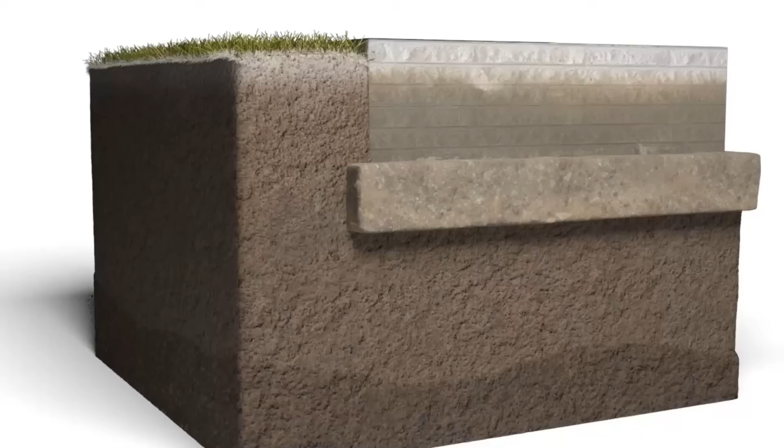Different surface types in the city respond differently to this weight. Clay soils with artificial fills, common in Brooklyn, yield slightly, leading to subsidence of 7.5 to 60 centimeters. Other soils experience less subsidence, and rock-based areas see as little as half a centimeter.

The scientific team warns against ignoring the double threat of sinking soil and rising sea levels. Since 1950, New York's coastal water levels have risen by about 23 centimeters. The east coast of the U.S. faces a particularly high risk from rising sea levels.

Hurricanes frequently cause flooding, as seen with Hurricane Ida in 2021, which overwhelmed New York City's drainage systems. Frequent contact with salt water weakens materials like concrete and steel. Other problems include a lack of floodplain standards, additional sinking due to groundwater extraction, and a lack of sediment in New York Harbor.

Sediment from the East River and Harlem River used to protect the city from strong northeast winds and hurricanes. Lower Manhattan's particularly at risk, with its southern tip only 1 to 2 meters above sea level. In October 2012, Hurricane Sandy caused over $70 billion in damages, mostly from flooding. In Rockaway Beach, homes were not only flooded but also caught fire, destroying 200 homes in Breezy Point.

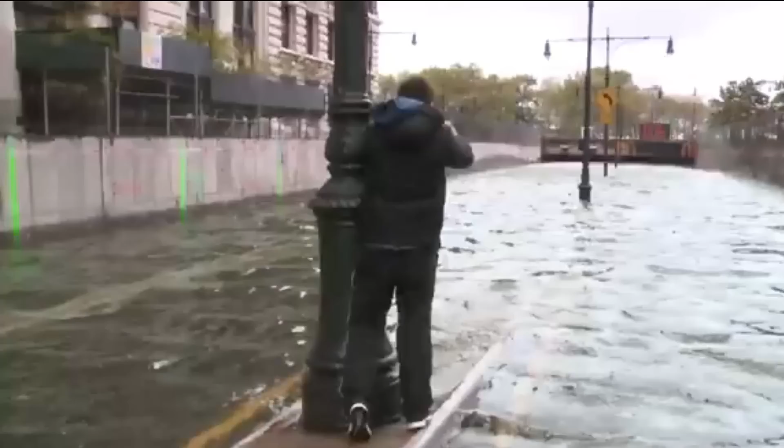Since then, a $1 billion federally funded program has fortified 9 miles of Rockaway's Atlantic-facing beach. The boardwalk was rebuilt in concrete to double its flood protection. Quarry stone groins were added to break the waves, and sand dunes were underpinned with a stone-filled trench and concrete wall. However, the bay side of Rockaway Beach has not received as much attention. If another storm like Sandy occurs, it could cause severe damage from the other direction.

A recent proposal by the U.S. Army Corps of Engineers has allocated a staggering $52 billion to protect the New York region from future storms. The plan includes a system of sea barriers and gates across the mouths of major bays and inlets along New York Harbor, and a seawall encircling Manhattan to barricade the island against the harbor that has long defined its identity.

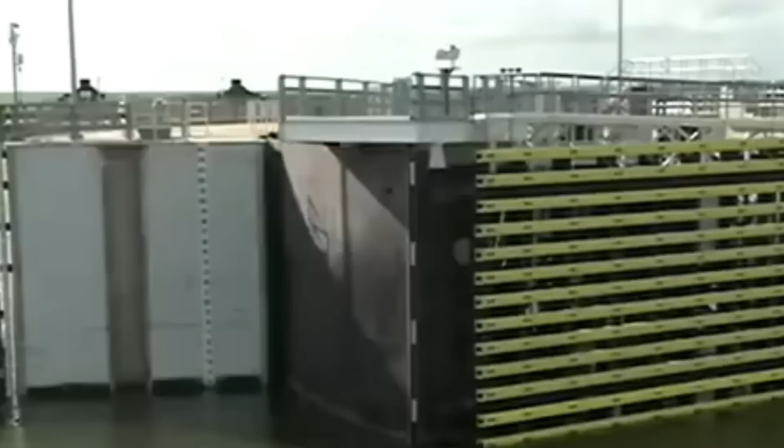If all goes smoothly, construction on the barriers could kick off as soon as 2030, with an expected completion date in 2044. However, critics argue that the cost analysis used by state and federal governments is skewed toward protecting property rather than maximizing protection for the largest number of people, regardless of their economic status. For instance, a $1 billion plan to protect part of Lower Manhattan would provide direct flood protection to just 62 condominium and rental buildings, 21 commercial properties, and 19 public buildings.

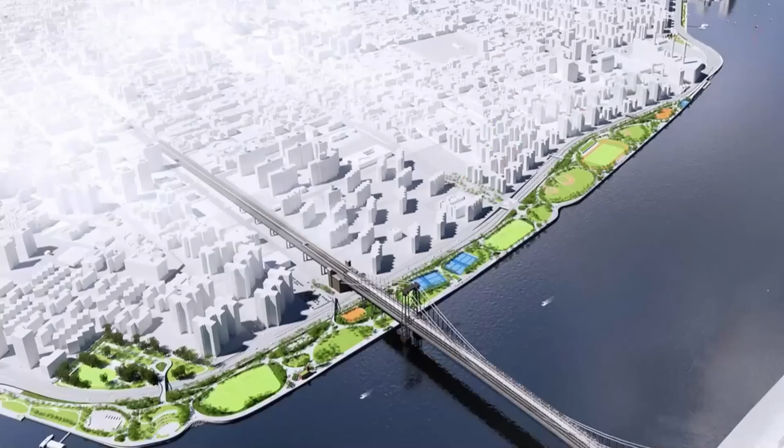So, what's the best solution that'll actually solve this problem? The Asser Levy renovation, completed in 2022, is part of the East Side Coastal Resiliency, the largest urban resiliency project currently underway in the U.S. Over the next 3 years, at a total cost of $1.8 billion, ESCR will reshape 2.5 miles of Lower Manhattan shoreline.

But ESCR is just one piece of a much larger $2.7 billion initiative called the Big U, a series of contiguous flood resilience projects that run from Asser Levy near 25th Street around the southern tip of Manhattan and up to Battery Park City along the Hudson.

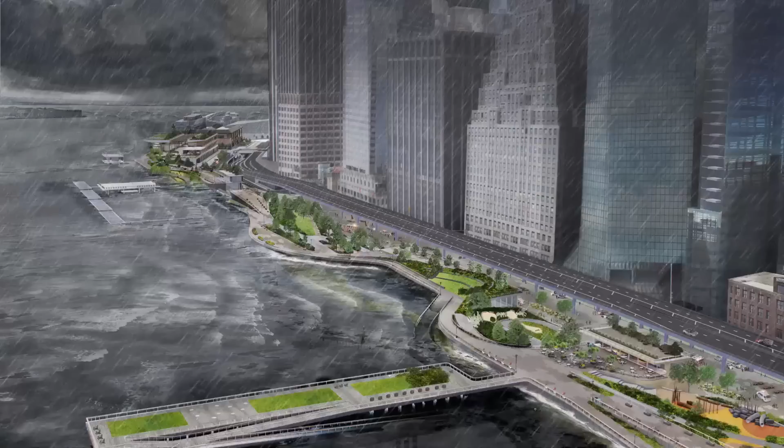When finished, the Big U will create 5.5 miles of new park space designed to protect over 60,000 residents and billions of dollars in real estate from sea level rise and storm surges. Residents of public housing rely on a narrow park to buffer their homes from a river that's already risen 8 inches. The Big U was conceived after 2012 Superstorm Sandy, which flooded 17% of New York City and caused $19 billion of damage. Like Hurricane Katrina back in '05, Sandy pushed New York and other flood-prone coastal U.S. cities, including Boston, Norfolk, Charleston, Miami, and San Francisco, to embrace the Dutch concept of living with water, which emphasizes building infrastructure that can both repel and absorb water while also providing recreational and open space.

In New York, ESCR, like any large infrastructure project in a densely populated area, has faced many challenges. Despite this, significant progress is being made.

The ESCR project area covers a flood-prone wedge of Manhattan's natural topography, a pinch point between two higher stretches of shoreline. 400 years ago, when the island was inhabited by the Lenni Lenape, this shoreline was woods and marsh that never rose more than a few feet above sea level. Tidal creeks drained from the uplands, dense with American chestnut, aster, and goldenrod, winding through Spartina meadows to the river.

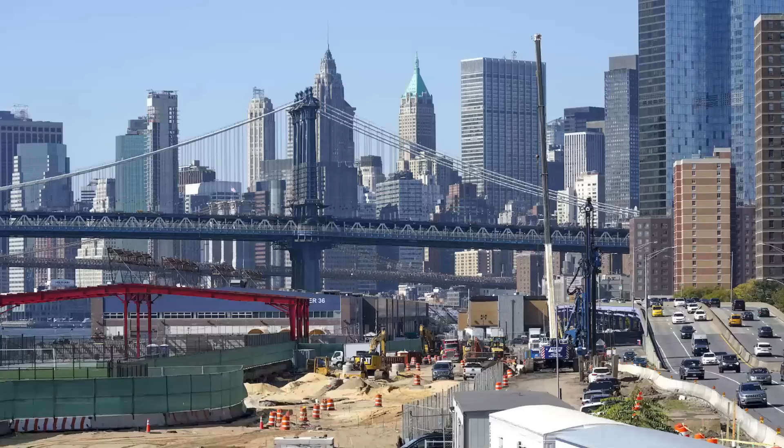Today, that landscape's buried beneath 4 public housing complexes whose roughly 10,000 residents depend on East River Park to protect their homes from a waterway that's risen 8 inches since the mid-20th century.

The East Side Coastal Resiliency ESCR project is the first segment of the Big U to get started, and it hasn't been an easy ride. From debates about its final design to budget cuts and new concerns about climate change risks, including this year's extreme rain events, the path has been rocky.

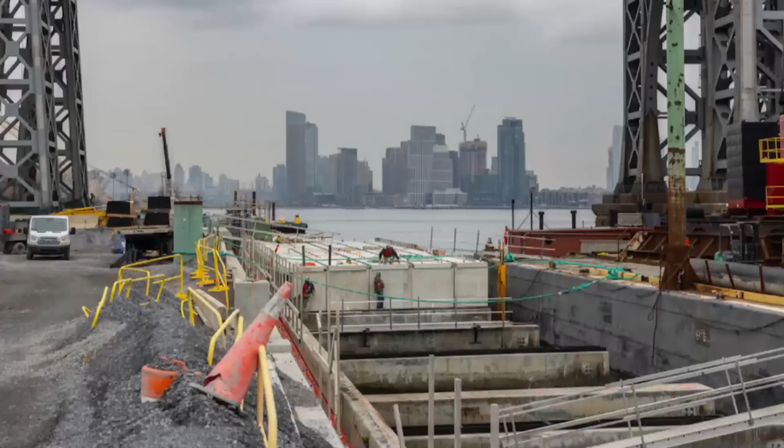The original 2014 design aimed to preserve East River Park's running track, tennis courts, and shady groves of pine, oak, and cherry trees. But in 2018, Mayor Bill de Blasio's administration quietly changed the plan. They argued it'd be faster and cheaper to clear the park, raise the landscape with over 1 million tons of fill, and then rebuild on top. Unlike the permeable buffers championed by the Dutch, the raised park would act more like a hard barrier.

While some opposed the redesign, many residents of the public housing complexes, which are at high risk of flooding, support it. In fall 2021, demolition crews began their work. The new park, with its pathways and vegetation beds, will act as a berm to keep water out of the city streets. Right now, a fence divides East River Park in half.

In the southern section, new steel sheet piles stand at the water's edge, about 8 feet above the original grade. The height can protect the adjacent city streets from a once-in-100-year storm like Sandy. Massive excavators are raising the park's elevation with fill from quarries in upstate New York.

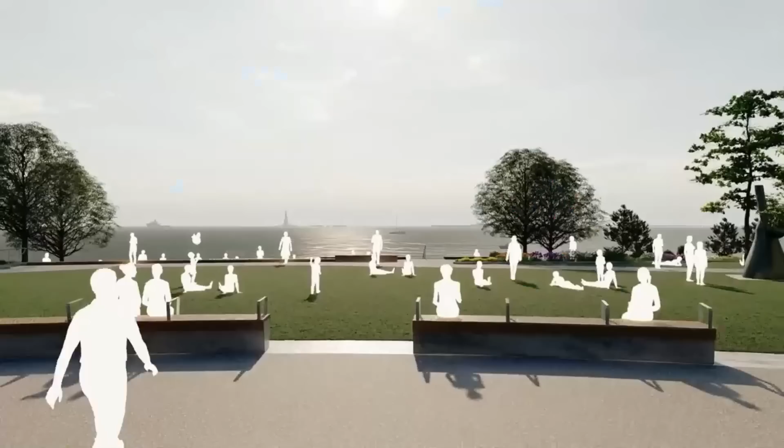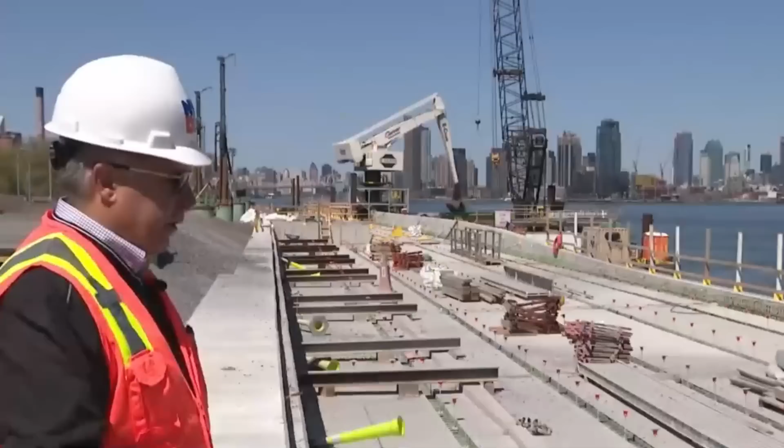Once completed, the park will feature pathways and vegetation beds winding around sports fields, an amphitheater, and playgrounds, creating a terrace landscape that'll keep water out of city streets. More flood walls and retractable gates will run the park's length and extend into surrounding streets, upgrading old infrastructure to prevent stormwater from mixing with wastewater during floods.

North of the fence, construction is almost complete at the Stuyvesant Cove Park, a narrow quarter-mile strip of land just south of Asser Levy Playground. Though the park may lack the original design's rain gardens and water-absorbent features, Stuyvesant Cove stays true to another Dutch principle, blending hard infrastructure into the landscape.

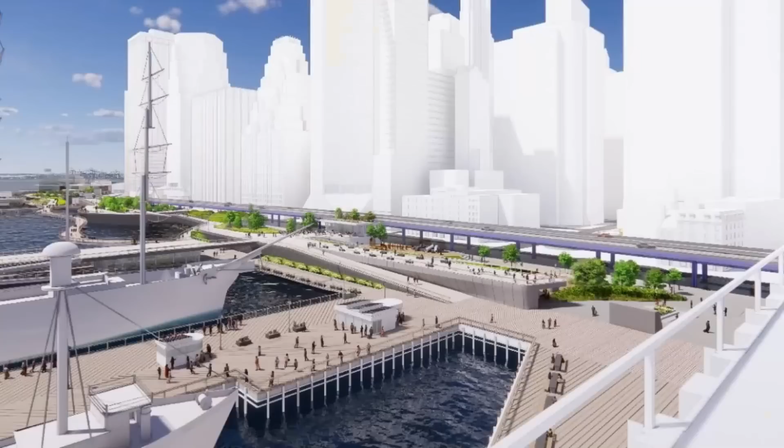Walking and biking paths wind through garden beds planted with salt-tolerant native plants like viburnum, wild cherry, and milkweed. The park's concrete flood wall and 2 retractable steel floodgates, one 42 feet long and the other 77 feet long, seamlessly blend with the rising topography.

Other segments of the Big U are also in progress. At the Battery, the southern tip of the city, the waterfront's being elevated with fill. Next, they'll install flood walls, higher capacity drainage, and new park spaces. Similar projects to protect the historic South Street Seaport area and the financial district are still in the planning and design stages.

Once completed, the Big U will safeguard the financial district, a hub of global economic activity, and tens of thousands of New York's most vulnerable residents.

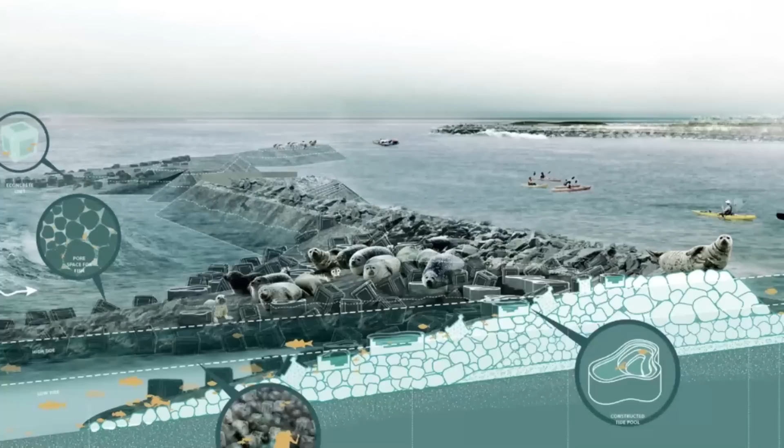In other boroughs, there's been even more progress. On Staten Island, the Living Breakwaters project, another winner of the Rebuild by Design competition, is on track for completion next year. This project features a network of breakwaters off Staten Island's southern tip to reduce wave action and provide habitat for marine life. The state's also bought and removed homes on Staten Island's shore to allow for periodic flooding. In Queens at Rockaway Beach, a steel-reinforced concrete boardwalk has replaced the wooden one lost during Sandy, and a concrete retaining wall helps keep sand in a new dune system from washing away during large storm surges.

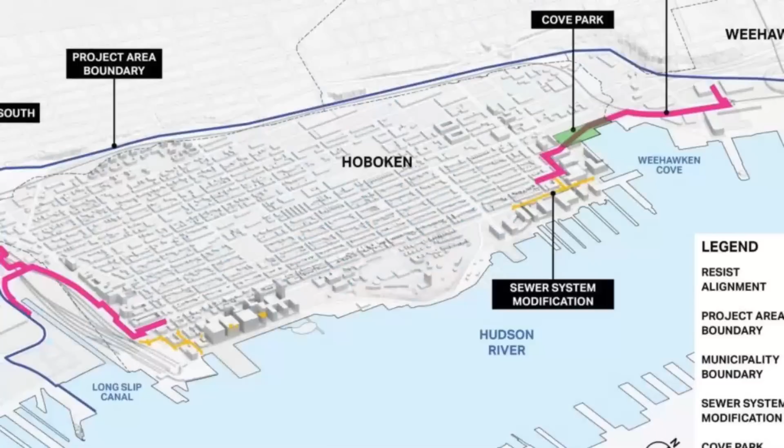The Dutch-inspired approach to resiliency planning is gaining traction in other U.S. cities. Across the Hudson River in Hoboken, New Jersey, one of the most innovative flood projects in the U.S. is underway. Unlike East River Park, Hoboken's implemented not just flood walls and sewer upgrades, but also park spaces that can hold and absorb excess water. This makes the city much better prepared to handle storm surges and the increasingly common rain bombs due to climate change.

New York State is, without a doubt, one of the cornerstones of American civilization, so it's hard to believe that this region's served by a decaying railway system. The Northeast Corridor is the longest electrified rail corridor, spanning up to 8 states from Washington, D.C. to New York to Boston. This 457-mile-long corridor is used by passenger and freight, as well as intercity travelers, serving 17% of the U.S. population. Dubbed the busiest railway line in the country, it supports more than 2,000 trains with 800,000 daily passengers.

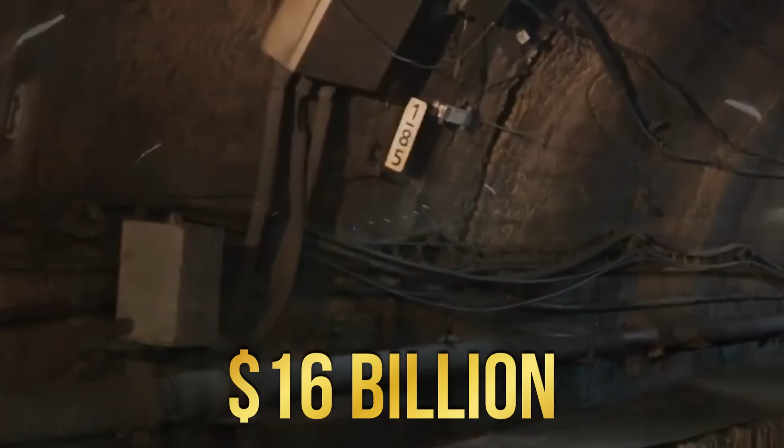The portion of the Northeast Corridor between Newark, New Jersey and Penn Station is 10 miles long and carries over 200,000 daily Amtrak and NJ Transit passenger trips. It has only 2 tracks which support approximately 450 trains, while a majority of the remainder of the Northeast Corridor has 4. The 2 tracks mean there's a traffic bottleneck in one of the most vital arteries of the region. Picture this: if even one of those tubes under the Hudson River becomes unoperational, it'll cause a $16 billion loss to the nation's GDP and add 30 minutes of travel time in an already congested railway station.

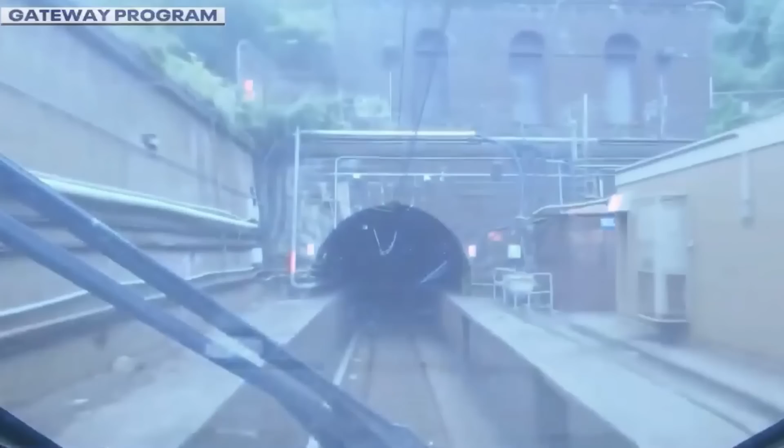At this point, it's very much in America's interest to make travel fast and headache-free in such an essential economic region. The Gateway program will replace and update rail infrastructure assets that, in many cases, are over 100 years old. The 2-track rail line used by Amtrak and NJ Transit Rail Operations has reached its full capacity of 24 trains per hour. To increase the railway capacity of this section of the corridor, there are several expansions planned.

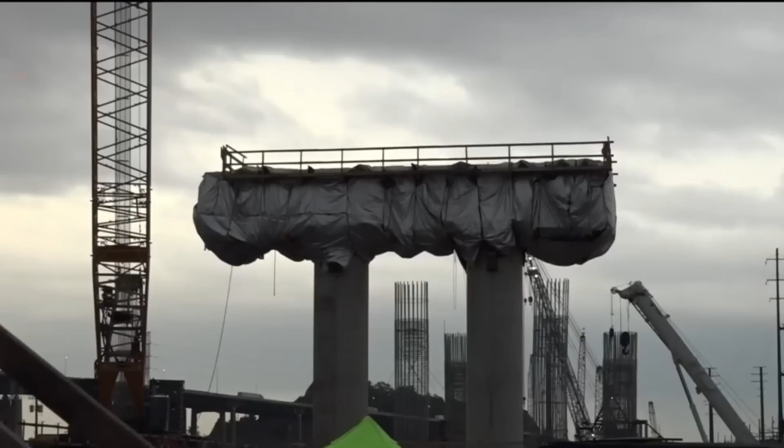This includes: 1. A new tunnel under the Hudson River. 2. Stabilizing the existing 100-year-old tunnel under the Hudson. 3. New tracks and platforms to be placed at Penn Station in New York. 4. Replacing the Portal Bridge and Sawtooth Bridges in New Jersey. These modifications and several others come at a staggering cost of $16.1 billion. But this price tag seems to be worth it, as this project will reduce travel time, inject $85 million a month into the economy, and create 72,000 jobs.

The construction will also utilize U.S. suppliers and manufacturers. More than just stimulating the economy, the Gateway program will eliminate 2 million tons of CO2 from the air. In the beginning, New York and New Jersey were going to divide the project expense, but luckily they'll be saving a few bucks as the government stepped in.

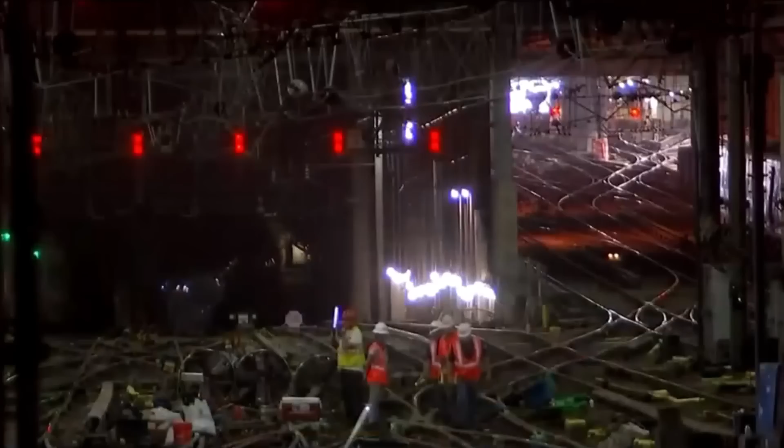As of now, the majority of the expenses will be covered by the federal government. Under the Infrastructure Act, the project received an additional $3.8 billion. Today's $3.8 billion infusion follows other funds I announced previously and brings the federal total to over $11 billion.

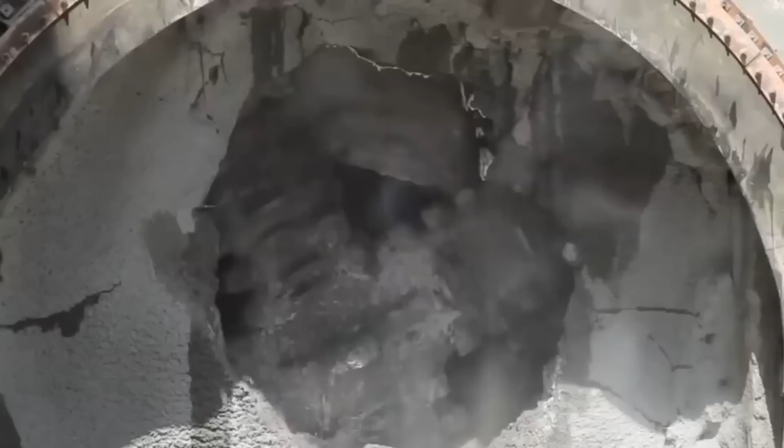Consequently, both New York and New Jersey only have to contribute 15% to the Gateway program. The project was proposed in 2011, but it took nearly a decade to convince politicians and federal agencies to fund this cause. In 2021, it was formally approved by the federal government. Work officially began in 2023, although completion is set for 10 to 12 years later. The first phase of construction includes creating a 2-track tunnel under the Hudson River and replacing the obsolete Portal North Bridge with an elevated one.

Let's start with the existing tunnel under the Hudson River, called the North River Tunnel.

The North River Tunnel is in desperate need of renovation, not just because it was built in 1910, but also because it was heavily damaged in 2012 by Superstorm Sandy. The intense flooding filled the tunnel with millions of gallons of salt water, leading to disabled trains, signal malfunctions, and delays.

In May 2014, Amtrak stated that within 20 years, one or both of the tunnels would have to be shut down, as they are more or less operating at full capacity.

The Pennsylvania Railroad started construction in 1903, and it was opened to the public in November 1910. The tunnel was considered state-of-the-art by the standards of the 20th century, but not so much now. It's a simple one-track in, one-track out system connecting New York and New Jersey. The tunnel was created using cast iron tubes, lying 20 feet below the riverbed and silt.

The neglected walls are unable to stop saltwater from intruding into the tunnel. The continuous leaking of saltwater has damaged the concrete, which is now falling apart. Inside the tunnel, two bench walls run on both sides, and these bench walls are also corroding.

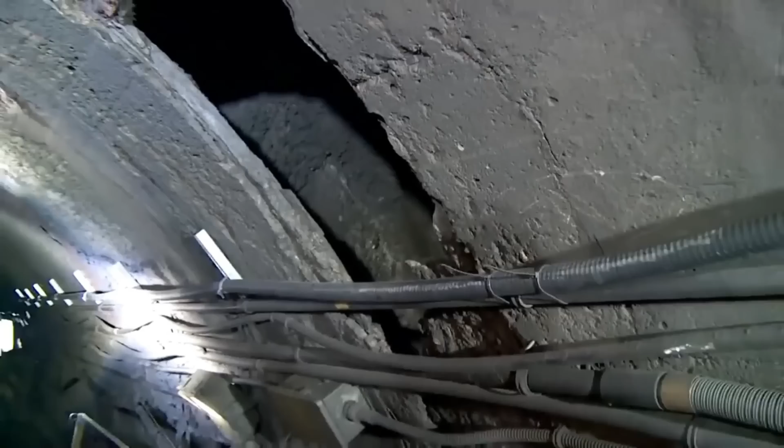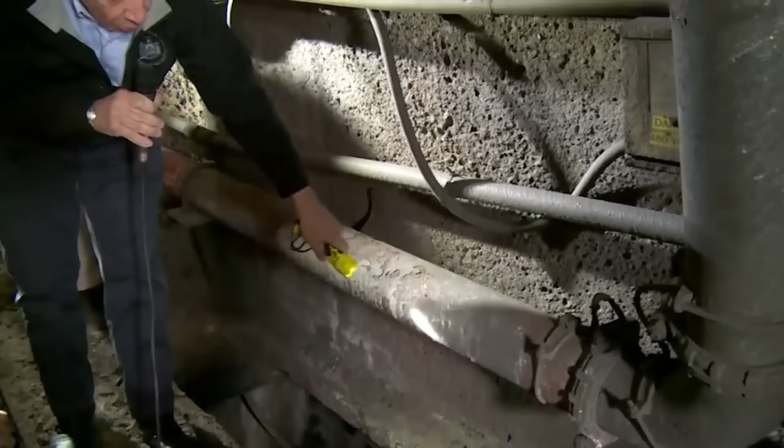The bench walls have ducts that store the power cables serving the trains and Penn Station. The final nail in the coffin was Superstorm Sandy, which left behind a large residue of salt on the cement walls, decomposing them over time and eroding the copper cables. As such, there's very limited flexibility when incidents occur in the tunnel.

The new two-track tunnel will be constructed between Bergen Palisades in New Jersey and Manhattan. So now, instead of one tunnel, you've got two tunnels under the Hudson River.

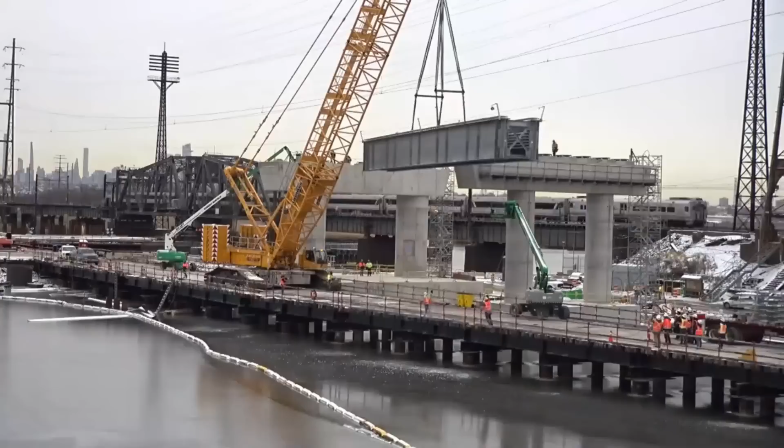Just like the North River Tunnel, the Portal North Bridge is also more than a century old and in dire need of replacement. It's a movable swing span bridge that crosses the Hackensack River, taking trains into and out of New York. Being a critical link of the Northeast Corridor, it carries 450 Amtrak and NJ Transit trains each day. Due to age and fragility, trains are restricted to a maximum of 60 miles an hour over the bridge.

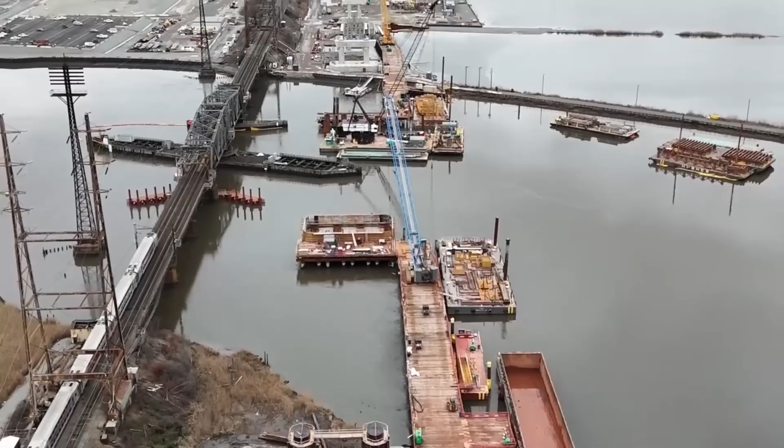As it is movable, it can open and close to allow maritime traffic to pass through. However, its electrical and mechanical components malfunction often, delaying the opening and closing of the bridge for trains. That's why engineers thought it would be best replaced by a modern, more reliable fixed-span bridge.

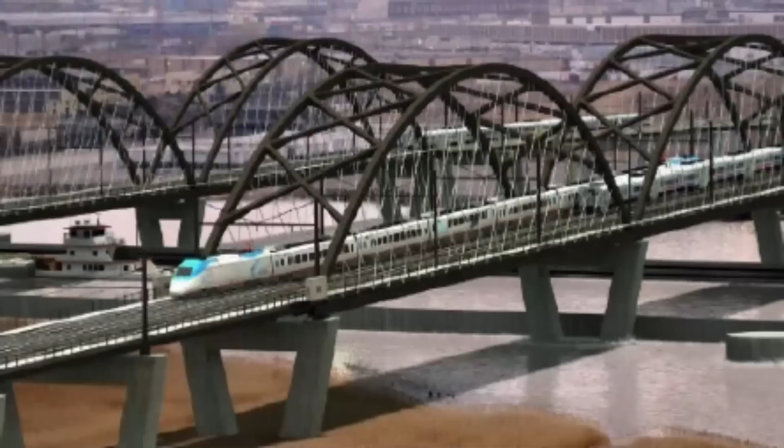Phase 1 also includes the construction of a concrete casing on the west side of Manhattan and Hudson Yards to preserve the right-of-way for the future tunnel to Penn Station in Manhattan.

Interestingly, before the Gateway project was even a thing, a similar project called Access to the Region's Core was being pitched. Although the idea was scrapped, this plan similarly aimed to create a new tunnel, a new rail yard, and a subway. A new station adjacent to New York Penn Station was to be constructed, as running more trains into the current station was deemed unfeasible.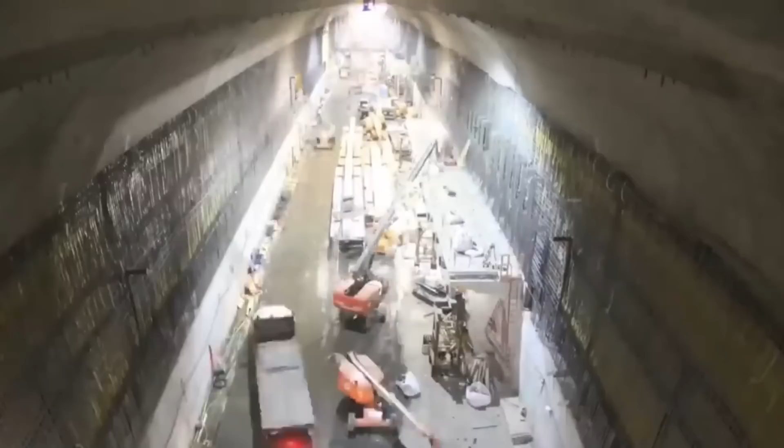An estimated budget for the project was $8.7 billion. Construction began in mid-2009 and the project was slated for completion in 2018. But in a shocking turn of events, it was canceled by Chris Christie, the governor of New Jersey, who cited the possibility of cost overruns and the state's lack of funds.

What's sadder is that $600 million had already been spent on that project. This decision remains controversial till today.

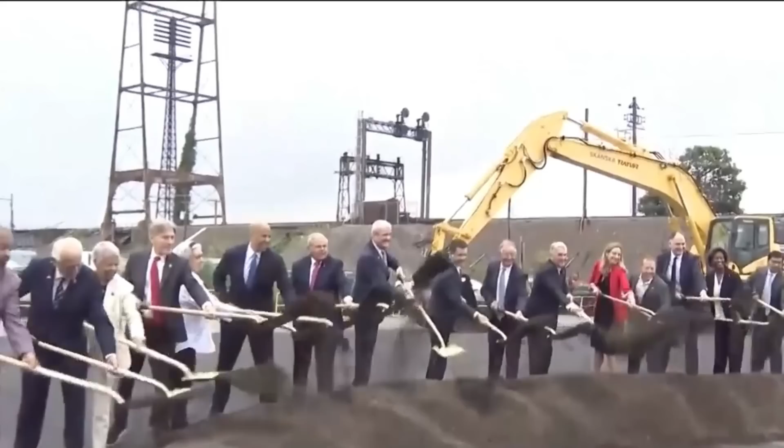The new bridge will feature a 4-track structure which will double the capacity in one of the most congested and complex locations on the corridor, where these different services all come together. The Federal Railroad Administration recently awarded this project up to $133.32 million in grant funding to support early construction activities.

The Sawtooth bridges are owned by Amtrak and are used by 400-plus trains a day belonging to New Jersey Transit, PATH, and Conrail freight trains.

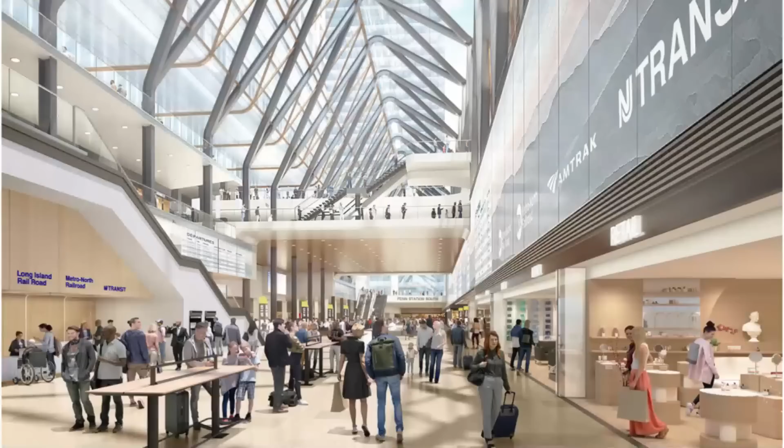Penn Station is also due for a multi-million-dollar overhaul. It's one of the busiest transit stations in the world, seeing an average of 650,000 visitors passing through its halls daily. Its 21 tracks accommodate approximately 1,300 train movements each weekday.

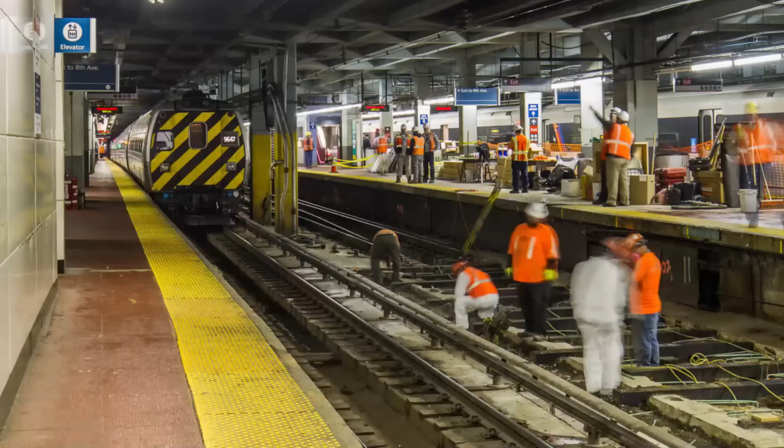The reconstruction is needed to correct the substandard conditions experienced by hundreds of thousands of customers at Penn Station. The project will add at least 9 new tracks, increase the number of entrances, and provide more accessibility options. New platforms, railroad systems, passenger concourses, underground connections, and support services will also be added. Overall, this expansion will allow more than a doubling of peak-hour passenger trains once future capacity improvements are constructed.

Another target of the Gateway program is the Dock Bridge, which crosses the Passaic River in Newark, New Jersey. Made operational in 1935, this 90-year-old structure is in for repair. Since it's a movable bridge, the plan is to convert it to a fixed bridge to reduce delays. The project would also repair the bridge's steel and concrete, and remediate and repaint its structure.

Officials at the Gateway Development Commission have publicly stated that by 2038, they'll have finished digging and constructing the new tunnels, then rehabilitating the two existing Trans-Hudson tubes. However, an audit by the U.S. Department of Transportation's Transit Administration shows this work will likely take until 2040. The complicated geography of the Hudson River poses a challenge and requires substantial prep work.

Despite the setbacks, the Gateway program is a much-needed step toward streamlining travel in a region that contributes almost 20% to the GDP and hosts 97 of the 500 Fortune companies. It's a critical element of the nation's transportation network, linking millions of people to good jobs and connecting this region with the rest of the country.

Imagine New York City with an extra 1,760 acres at its southern tip. This is the bold vision of Rutgers professor Jason Barr, who aims to combat rising sea levels while providing 180,000 new homes for 247,000 people. The new land, called New Mannahatta, harks back to the island's original indigenous name.

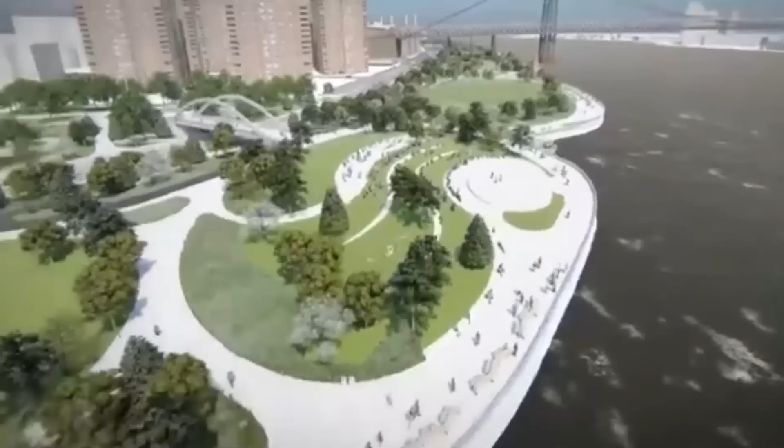City leaders and engineers stress that a climate resiliency plan is crucial. Without action, much of Lower Manhattan could become unusable. A risk assessment found that 70% of Lower Manhattan's shoreline needs infrastructure improvements, including flood defenses extending into the East River. Areas between the Brooklyn Bridge and the Battery are particularly vulnerable.

Could expanding Lower Manhattan also address the city's housing shortage? Absolutely. New York City faces a severe shortage of affordable housing, reshaping local demographics and culture in real time. Gentrification, while criticized, also brings benefits like a more stable economy, reduced crime rates, and increased local revenues, which can fund public services and infrastructure improvements.

New York City continues to attract immigrants, with over 45,000 migrants arriving in the past year alone. This influx strains the city's shelter system and sparks policy conflicts between New York and Washington. Expanding Lower Manhattan could provide much-needed housing and space for services and infrastructure to support economically disadvantaged residents.

And the best part is, we already know this works. Consider this timeline that depicts the expansion and growth of Lower Manhattan in both size and worldwide dominance. In 1699, the old Dutch Wall was removed to make way for Wall Street.

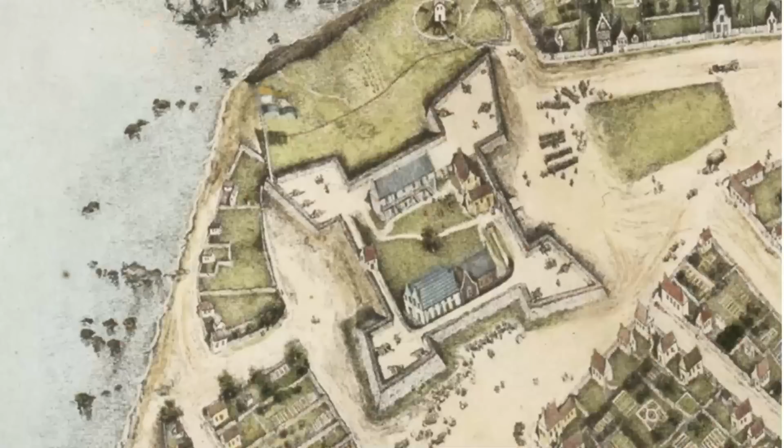By 1825, Lower Manhattan had fewer than 170,000 people and lacked a regular police force or trained fire department. From 1869 to 1883, the Brooklyn Bridge, the first to use steel for cables, linked Manhattan and Brooklyn. In 1693, the British built dirt platforms at the southern tip of the island for military defense. They did it again in 1735, calling it the Copsey Battery. The remains of Fort George, also known as Amsterdam, were used to expand the battery in 1788.

Castle Clinton was built on a small artificial island just off the shore. Construction began in 1808 and the fort was finished in 1811, though they kept making changes through the 1820s.

Starting in 1855, the battery was mostly created by landfill using dirt from street widening projects in Lower Manhattan. This connected Castle Gardens Island to the mainland of Manhattan. The original shoreline is now roughly the modern park's eastern boundary at State Street.

In the 1960s and 70s, landfill was used to create the 92 acres that make up Battery Park City. The first 24 acres were built on 1.2 million cubic yards of material from the construction of the original World Trade Center. More fill came from other projects like the New York City Water Tunnel and the dredging of Kill Van Kull.

The East River waterfront has shifted over the years, moving to Water Street in 1730, then to Front Street in 1780, and finally to South Street by 1800.

In 2013, then-Mayor Michael Bloomberg proposed a project called Seaport City, envisioned as a development similar to Battery Park City. This project aimed to revitalize the area around the South Street seaport.

Six years later, in 2019, Bloomberg's successor, Bill de Blasio, introduced a plan to address the increasing threats of climate change. This plan included creating up to 500 feet of new land extending from South Street to the East River, south of the Brooklyn Bridge. The objective was to protect South Street Seaport and the financial district from potential damage caused by rising sea levels and severe weather events.

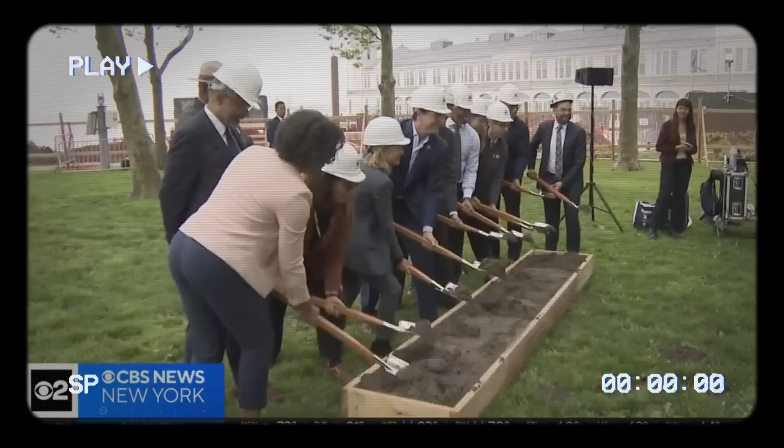In 2021, the City of New York unveiled the Financial District Seaport Resilience Plan. This ambitious initiative targets a 0.9-mile stretch of shoreline in Lower Manhattan, known for its complexity and vulnerability. The plan includes constructing floodwalls, floodgates, pumps, and other advanced water management systems to handle tidal flows, flooding, and stormwater. The construction will extend between 90 and 200 feet into the East River, providing robust protection against future climate-related threats.

Gansevoort Peninsula, now part of the Meatpacking District at the northern end of Greenwich Village, was originally a spit of land extending into the Hudson River. The North Battery, an artillery installation, was built there between 1808 and 1811 and was connected to Hubert Street by a bridge and jetty. In 1812, Fort Gansevoort was completed between Gansevoort Street and West 12th Street.

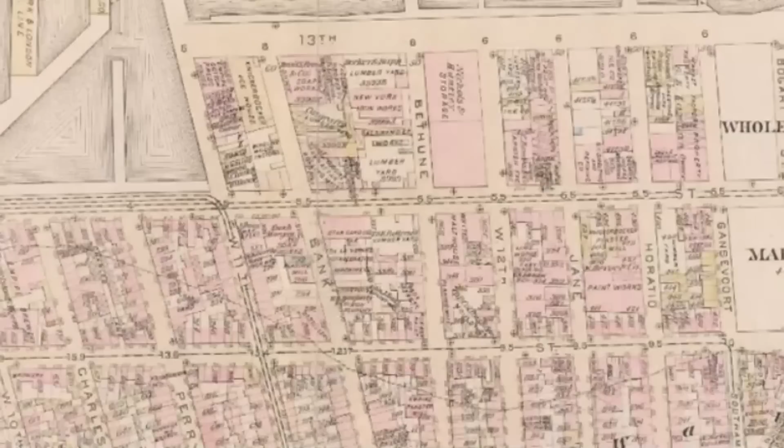In 1837, landfill was used to create 13th Avenue. West Washington Market was established in 1887.

New York City faced a unique challenge and addressed it by removing a block of land created by the 1837 landfill, which had extended Manhattan to 13th Avenue. This controversial move involved condemning many businesses, but the city could not condemn the West Washington Market, which remained as a landfill.

The market eventually closed, and the dock was converted into a sanitation facility for loading garbage barges headed towards the Fresh Kills landfill. The only part of 13th Avenue that survived was behind this facility. In 2016, the city started demolishing the Department of Sanitation building to make way for a new public park. Little Island at Pier 55 is just to the north of this area.

In 1911, Canadian-American engineer Kennard Thompson proposed an expansive plan called a Really Greater New York. His vision included expanding Lower Manhattan into Governor's Island, which was undergoing land reclamation to create New Manhattan. He also proposed creating new islands in Lower New York Bay and altering rivers. One of his goals was to stop the northward expansion, which he believed harmed downtown businesses.

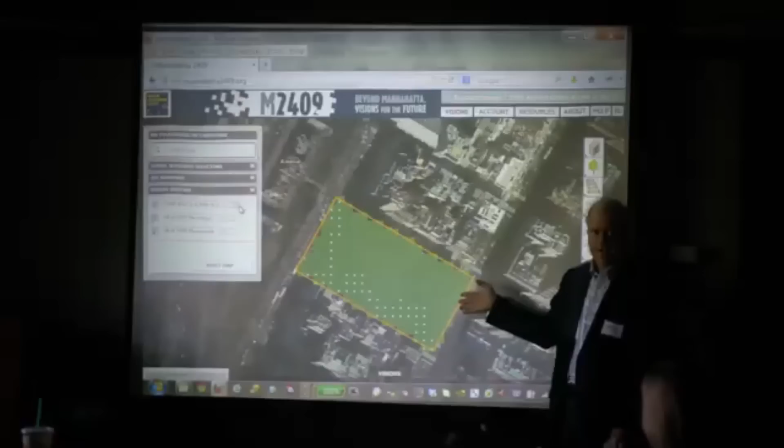Over the years, Thompson refined his idea and formed the Manhattan Extension Corporation in 1921, supported by prominent figures like former judge and presidential candidate Alton B. Parker and artist Walter Russell. Thompson continued to advocate for his vision throughout his life.

A century later, Vishaan Chakrabarti, a professor at Columbia's University Center for Urban Real Estate, proposed a similar idea. He suggested using landfill to connect Lower Manhattan and Governor's Island, creating a new neighborhood called LoLo, Lower Lower Manhattan. While this proposal highlighted benefits, it also faced challenges such as high costs, strict regulations on building with landfill, and potential environmental impacts. In 2015, author John Methvin revisited the proposal in The Awl, humorously dubbing the new borough Frankenborough.

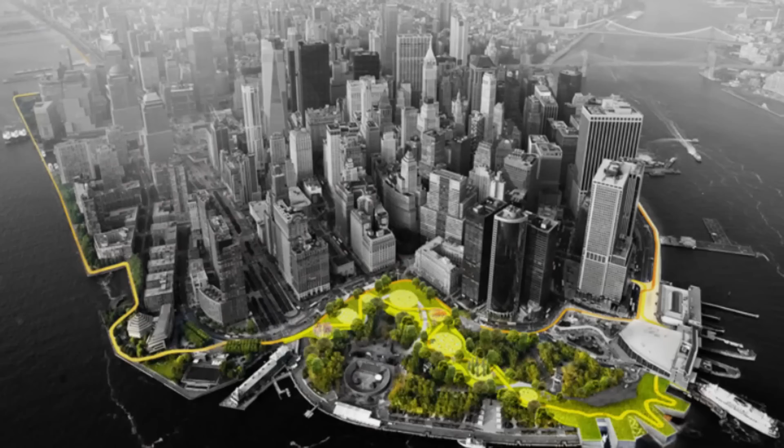In 2022, Rutgers University urban economist Jason Barr proposed the New Manhattan Project, continuing the vision of expanding Manhattan. However, this idea faced criticism, particularly from Willy Blackmore and Curbed, who raised environmental concerns about the proposal. New York City's survival and growth hinge on how well its 520-mile coastline is protected.

In the past, rapid port development dramatically changed the coastline's topography, with dredging to make way for bulkheads and piers to facilitate shipping. Much of the city's coastline lacks purpose-built defenses against high tides or storm surges. Instead, there are sandy beaches used for recreation that have been supplemented with sand to replace erosion losses. Until recently, the city's natural coastal areas and wetlands have been underutilized, failing to provide crucial protection where inland buffers and other structures could have played a significant role in strengthening the coastline.

Hurricane Sandy struck the Battery in Lower Manhattan, generating a massive surge that created a storm tide over 14 feet above mean lower low water. The surge overwhelmed beaches, boardwalks, and bulkheads, eventually flooding the streets of Lower Manhattan.

Projections indicate that such scenarios will become more frequent and intense as climate change produces more erratic and unpredictable weather.

The Manhattan Island Extension Project aims to provide near and long-term solutions to enhance the area's climate resilience. The goal is to fortify the coastline, reducing the hazards posed by climate change and land exposure in Lower Manhattan by the 2050s and 2100.

Tools being discussed for this project are deployable protection, flip-up barriers, parallel stormwater system, raised edge, sea level rise protection, elevated esplanade, raised edge, surge protection in some areas, and seepage barrier.

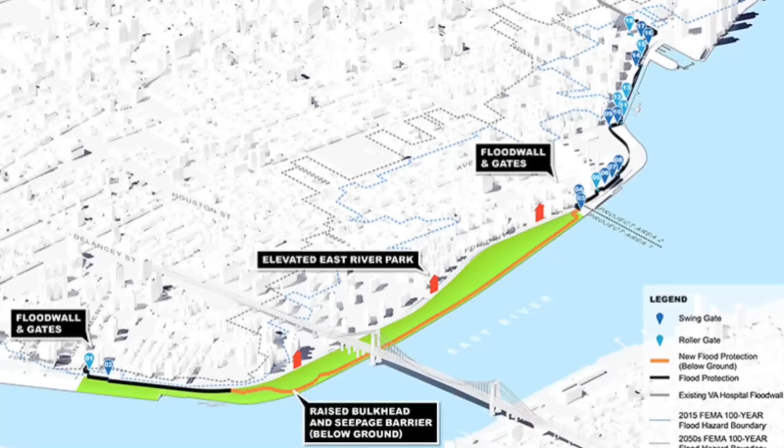The project's goal is to prevent floodwaters from coming directly inland from the ocean, reduce water surges over beaches and bulkheads, and prevent flooding of neighborhoods and critical infrastructure such as tunnels. This initiative, aside from saving New York City, aims to provide robust protection against future climate-related threats.

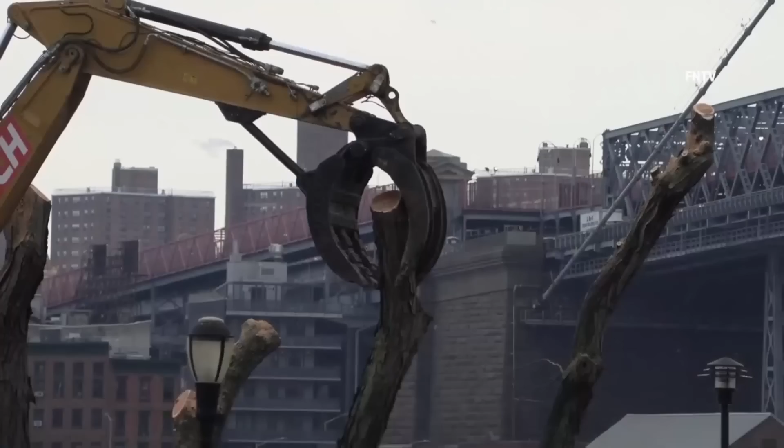If the plan to significantly increase land in Lower Manhattan moves forward, the next crucial question is how best to utilize this new space. It'll likely require voter and legislative support to ensure some of this land is allocated for low to medium income housing and multi-use spaces for the homeless and migrant population.

Expensive housing prices in large metropolitan areas are not just a New York City issue. Cities like San Francisco, Seattle, Boston, and D.C. also face affordable housing shortages due to changing urban economics. From millennials to Zoomers, many professionals prefer urban lifestyles over suburban living, at least until they start families.

Refurbished brownstones, new condos, townhomes, and luxury apartments are prevalent in the Lower Manhattan real estate market, providing a significant economic boost through dining, retail, sports, and entertainment industries.

However, it's clear that more affordable living spaces are needed, even if not directly in downtown areas, at least within city limits. This would allow people to stay close to employment and city amenities.

If the plans for 1,760 acres of reclaimed land materialize, providing 180,000 new homes for 247,000 people, it'd be a missed opportunity if affordable housing isn't included.

It's exciting to think that the solution to harden NYC's coastal land could also address the city's overcrowded and expensive housing market. The looming threat of climate change is upon us, but so is the challenge of housing a growing population critical to NYC's survival.

Everything that makes New York City special is based on the wide diversity of its population, and it's essential that all residents continue to enjoy the Big Apple.

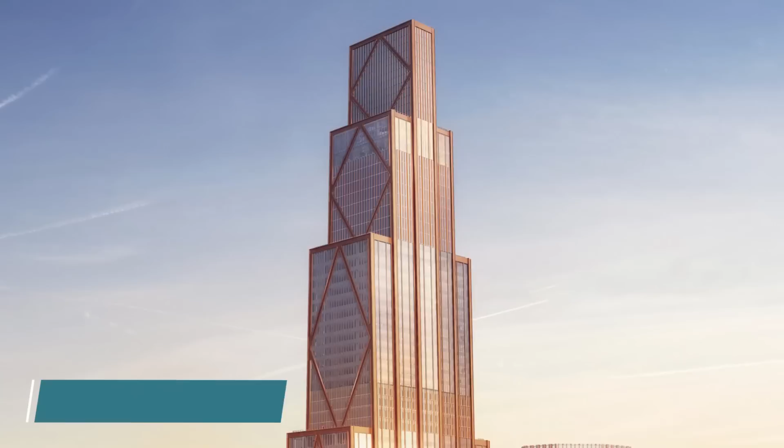Number 1, 270 Park Avenue. It's a 1,388-foot tall skyscraper under construction in Midtown Manhattan in New York City. This state-of-the-art building will serve as the new headquarters of J.P. Morgan, the largest bank in the U.S.

270 Park Avenue will replace the old HQ Union Carbide building that served as the company's headquarters since the 1980s.

In 2018, it was announced that the former Union Carbide building would be demolished to build a tower twice as tall. The new building will span up to 70 stories and will provide space for 14,000 employees.

It's designed by Foster + Partners, the firm behind legendary structures like the Hearst Tower, London City Hall, and Apple Park. There are 24 massive columns at the base, which will support a lobby measuring about 80 feet high.

The lifted base will create more outdoor space on the ground level on Park and Madison Avenues, which the studio plans to complement with a public plaza and green spaces.

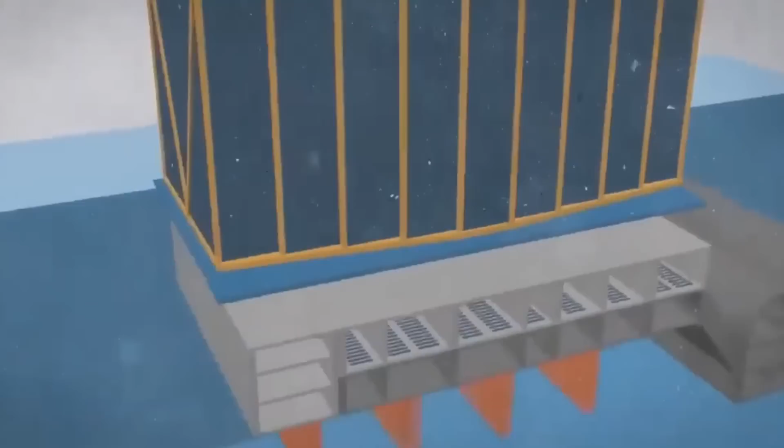To secure approvals for the tower, the New York City Council dictated J.P. Morgan to spend $40 million improving the district's condition and building a 10,000-square-foot public plaza in front of the tower. This will give Park and Madison Avenues 2.5 times as much ground-level outdoor space. It'll include enlarged walkways equipped with natural vegetation and services for neighborhood residents, workers, and regular guests.

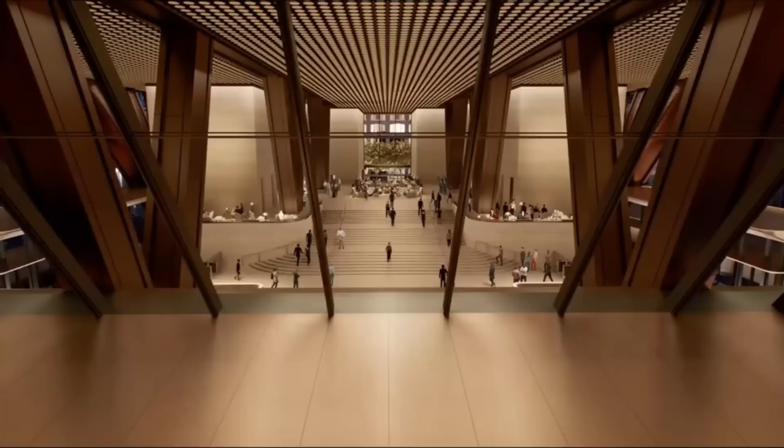Talking about the overall design, the tower consists of several vertical columns of differing lengths pressed together to form a step structure. The interior will feature 2.5 million square feet of working space along with a food hall, a penthouse conference center, and a fitness center. All this will come at a hefty price tag of $3 billion.

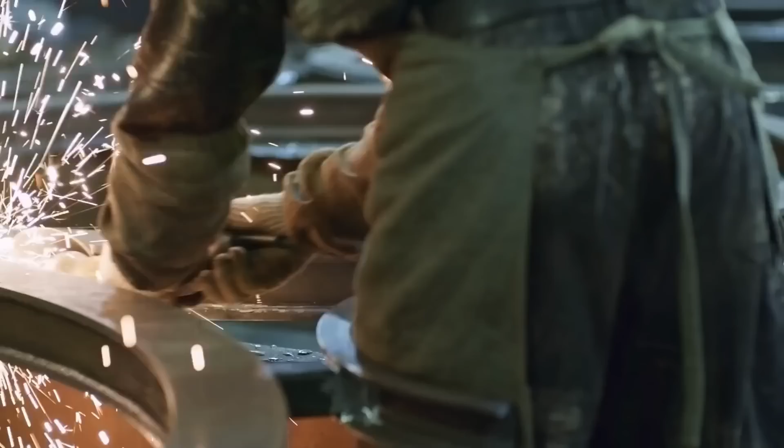The outstanding thing about this building is that it's going to run entirely on hydroelectricity. This makes it the biggest all-electric tower in New York, combined with the fact that it'll have zero net emissions. Foster + Partners claimed that 97% of the building materials were recycled during construction. Over 3 years, more than 93,600 tons of U.S.-made and fabricated steel, 93% of which is recycled.

The old building was demolished between 2019 and 2022, making it the tallest building to be voluntarily demolished. The previous record was held by the Singer Building, one of the earliest skyscrapers in Manhattan, that was later demolished in 1968.

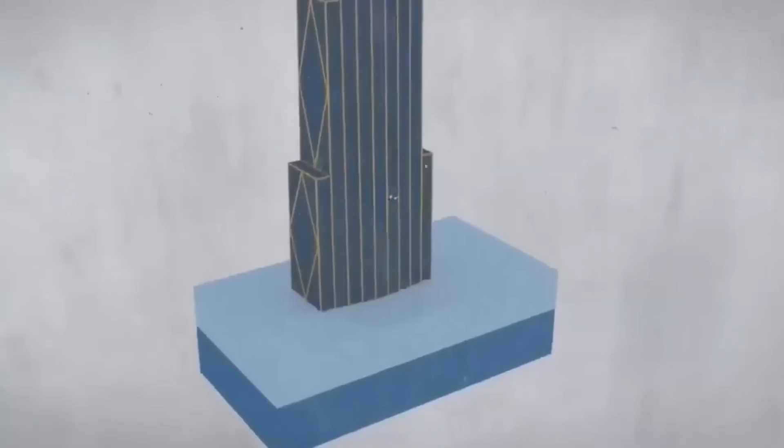To build such a large building, J.P. Morgan had to purchase hundreds of thousands of square feet of air rights from the nearby St. Bart's Church and MSD Capital. Initially, 270 Park Avenue was supposed to be even taller, with a planned height of 1,400 feet. However, such a length requires deeper foundations that could interfere with the Grand Central Terminal directly beneath the tower and the East Side access tunnels.

By late September 2023, construction had reached the 4th of the 5 tiers. The steel skeleton of the tower is complete, and the last beam was placed in November 2023. The whole project is slated for completion in 2025.

Until the tower is finished, J.P. Morgan and its employees are using 383 Madison Avenue as temporary office space. During the building period alone, the project will create more than 8,000 construction jobs across 40 local unions. The tower's construction injected $2.6 billion into New York City's economy.

However, the design of the new headquarters is not without its share of criticism, particularly about its base columns. Architectural critic Alexandra Lange described the building as a son of Hearst Tower grafted on top of creepy legs, while others drew comparisons between the base columns to that of a ballerina's toes. But that's just their opinion, isn't it?

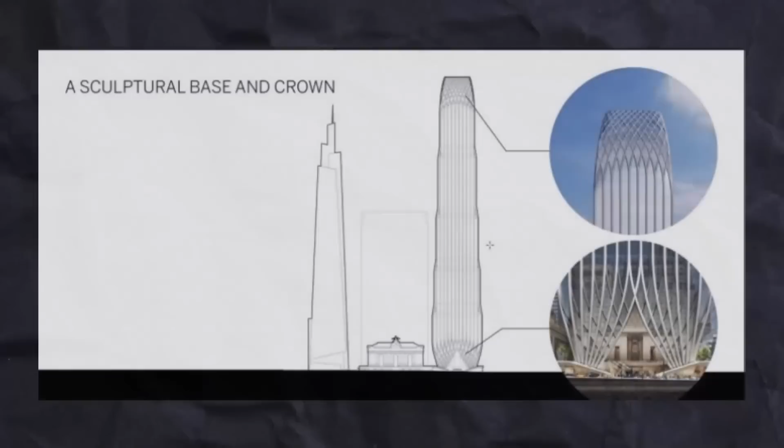Number 2: Commodore Tower on 175 Park Avenue. This tower's design is limited to paper only, but if realized, it can be the 3rd tallest building in New York City after the World Trade Center and Affirmation Tower. Towering up to 1,575 feet, 175 Park Avenue will be a super tall neighbor of the Grand Central Terminal. It's intended to replace the Grand Hyatt Hotel owned by former President Donald Trump. The 26-story Grand Hyatt is 290 feet tall, but its successor will be grander, offering 2.2 million square feet of space for office, a new 500-room hotel, retail, and 25,000 square feet of publicly accessible terraces.

As far as the design's concerned, it'll have a tapered shape that'll be set back in 4 tiers. This tapered design is a nod to the old skyscrapers in New York, and it'll allow more light to reach the street. Glass and steel columns will run parallel on the outer skin of the tower, encasing its stone-clad core. At the base and the very top, these same columns will crisscross each other to form a beautiful lattice pattern.

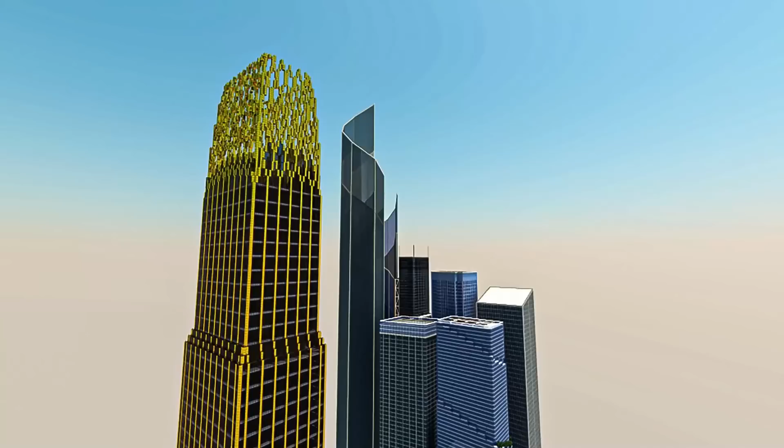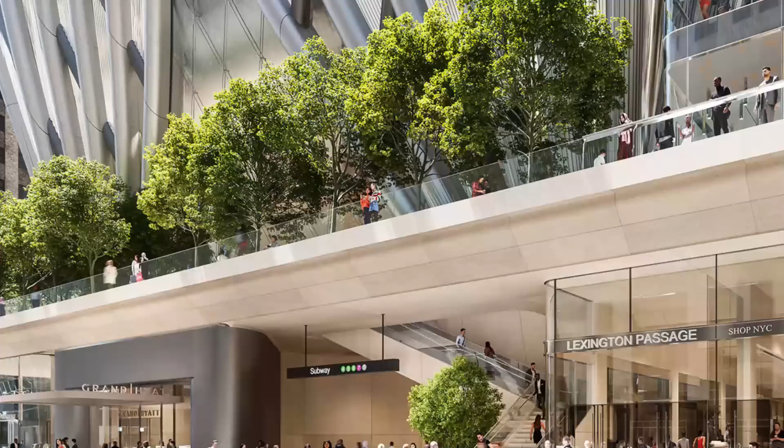The elevated public plaza along the eastern side of the property can be accessed by an outdoor staircase along East 42nd Street. The main lobby will feature a soaring atrium guarded by the triangular glass facade, allowing unobstructed views of Lexington Avenue and East 42nd Street. Notice how the huge steel framework over the lobby resembles a giant metallic hand trying to swallow the building.

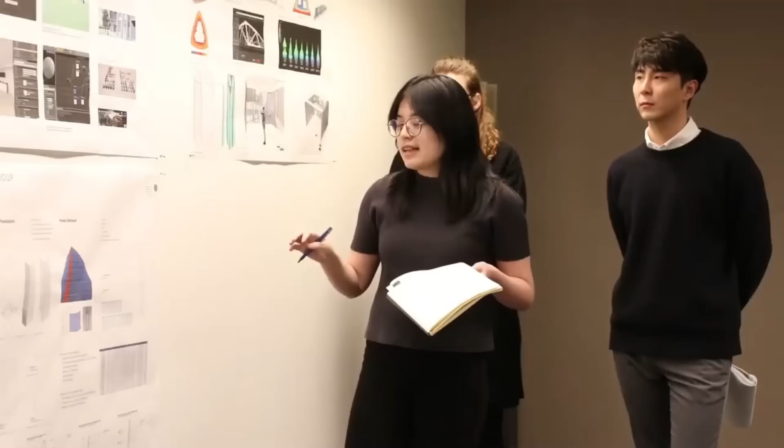Proposed by Skidmore, Owings & Merrill, or SOM, the new tower is set to solve the congestion on the pavement and build a clear path between 175 Park Avenue and the nearby Grand Central Terminal. In return for building this behemoth, the developers will spend hundreds of millions of dollars on new transportation infrastructure, including improvements to Grand Central Terminal, a new subway entrance on 42nd Street, and other public realm improvements.

An additional $5 million would be set aside for local nonprofit organizations and promoting art in the area. 175 Park Avenue will be located adjacent to the iconic Chrysler Building, which will no doubt be overwhelmed by the scale of the new skyscraper.

The Chrysler Building is just over 1,000 feet tall and gracefully reminiscent of New York's past. While the silhouette of both buildings is similar, the Chrysler Building's slim and needle-like proportions give it an air of elegance unknown to the new generation of skyscrapers.

To be fair to the new skyscrapers, they're made bulky as prospective tenants demand larger floor plans to accommodate office, retail, and wellness facilities. Not to mention that New York remains the blue-eyed boy for many startups, businesses, and talented professionals. So the demand for spacious and cutting-edge high-rise developments isn't going away anytime soon.

Moreover, the 2017 Midtown East Zoning Initiative also encouraged bulky structures like One Vanderbilt, 270 Park Avenue, which we just discussed, and the future 350 Park Avenue to come into existence.

For the tower to truly absorb its surroundings, it'll incorporate elements from its surroundings. For example, the skyscraper's use of stone and visual symmetry echoes the vibe of the Grand Central Terminal Station.

One of the challenges of this mega project is that it sits directly over some of the subway lines of Grand Central Station. That's why the demolition process has to be carried out carefully, in addition to improving the layout of the underground train station.

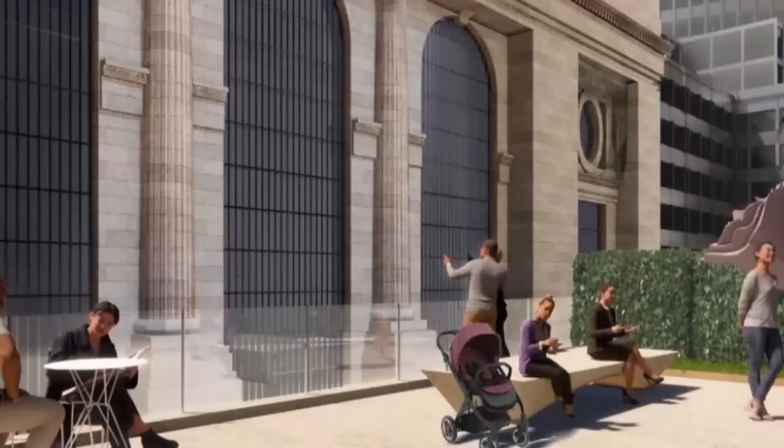3 new public terraces offering seating, food, and drink options will be built around the skyscraper, accessed via staircases and escalators. One of them, called the Chrysler Terrace, will allow visitors to have Instagram-worthy pictures of the vintage Chrysler Building.

The developers RXR Realty and TF Cornerstone acquired the site in 2019. In late 2021, the project gained approval from the New York City Council. However, the initial height of 1,646 feet has been slashed to the current 1,575 feet. Nevertheless, it's still enough to surpass Central Park Tower in New York. It's expected the construction will commence in 2026 and will be completed by either 2029 or 2030.

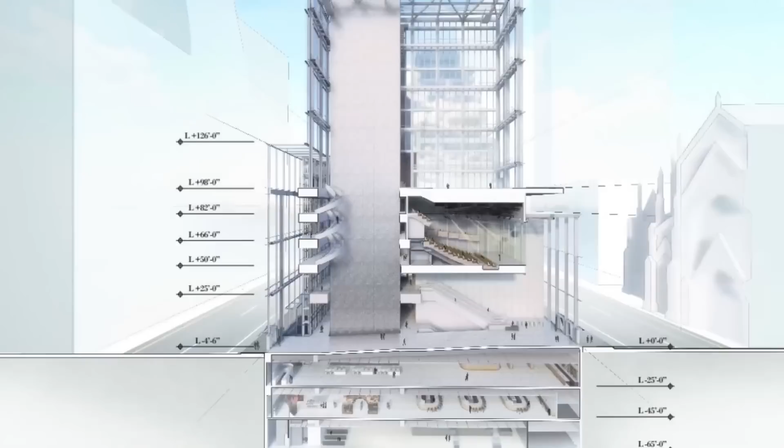Number 3, Tower 5th. This is another proposed tower at Midtown Manhattan. The developer, Harry Macklowe, first revealed plans for this 1,556-foot tall tower in 2019. This means that it'll only be a few feet shorter than 175 Park Avenue, crowning it as the 4th tallest building in New York.

Its proposed location is directly north of St. Patrick's Cathedral, wedged between Madison Avenue and 5th Avenue. Gensler is the design architect for the building. Harry Macklowe finalized the $44 million purchase of this particular site in 2019.

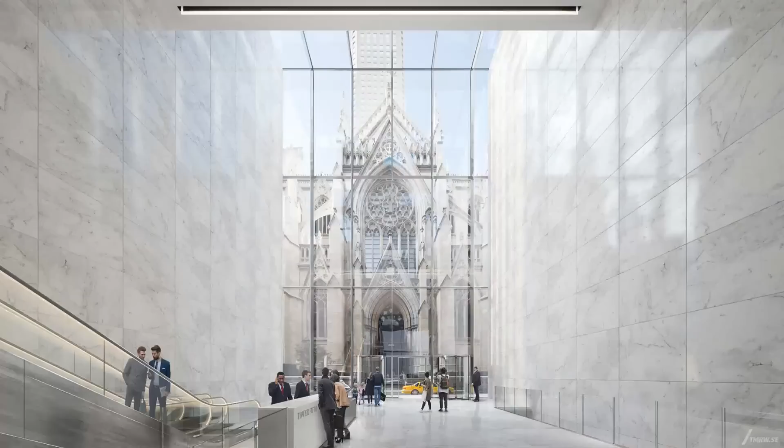The tower will enclose 960,000 square feet of office space, as well as shops, a food hall, and an auditorium. At the top of the tower, the city's highest observatory will offer unprecedented views, as well as unique experiential, cultural, and entertainment experiences. On the ground floor, there will be an 85-foot lobby that will secure the life-size view of St. Patrick's Cathedral.

There's nothing out of the ordinary about the outside appearance of the tower, except the narrow pedestal on which it stands. The pedestal rises nearly 400 feet above the street, higher than the spires in the nearby cathedral. The very top of the skyscraper reminds us of a wooden Jenga tower.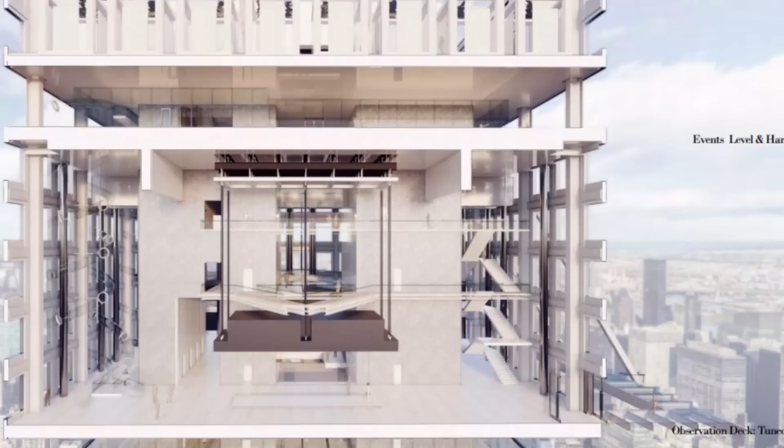Okay, so the reason it looks like this is it'll have a sky lobby on the 40th floor. Its observation deck, called the Sky of the Americas, will sit 1,451 feet high, making it the highest such attraction in the United States and the second highest in North America.

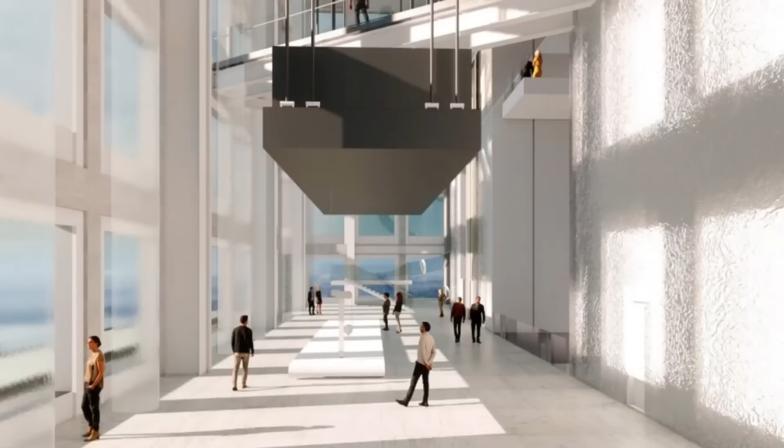Each floor offers 19,800 gross square feet of space without any columns and a line of windows, much like the fenestration of 432 Park Avenue.

A restaurant sandwiched between the upper blocks will be encased by floor-to-ceiling glass. Imagine eating your lunch at such a height with a whole skyline of New York in front of you. A nerve-wracking experience for sure.

Other features include a retail and food market in the cellar levels, an atrium that spans the whole height, expansive seating areas, and a 3-story auditorium.

The tower itself will be wrapped in an energy-efficient closed-cavity facade system to reduce solar heat gain by over 70%. It'll be the first deployment of this type of system in North America.

The next part isn't for the faint-hearted. There will be a protruding glass plate, almost like the skywalk at Grand Canyon.

2 small buildings, one of them being the Venezuelan consulate, will be demolished to free up space for the tower. But let's keep in mind, securing approval for this mega project would be a lengthy struggle.

Its proximity to 5 landmark buildings, including Rockefeller Center and St. Patrick's Cathedral, bring Macklowe's project into clash with the Landmarks Preservation Commission. Additionally, if the project's to go forward, Macklowe would have to transfer air rights from St. Patrick's. Since Tower Fifth is planned to be 66% larger than current zoning allows, Macklowe will require special permits, zoning approvals, and zoning changes to execute the project.

If the project gets the green light, it'll no doubt redefine the skyline of the city.

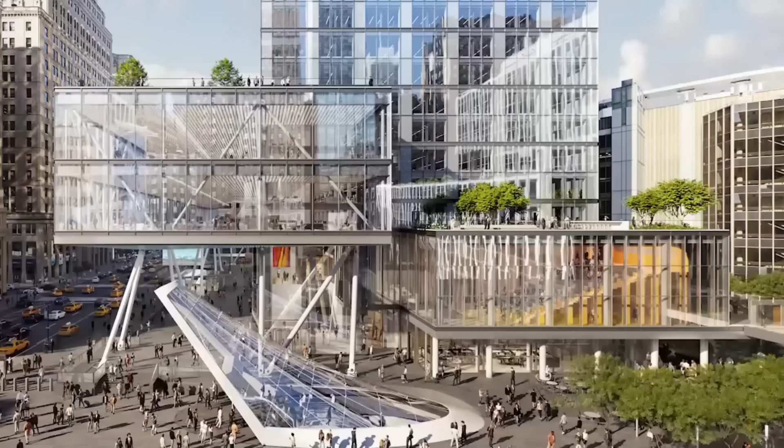Number 4, 15 Penn Plaza. This is a planned office tower to be constructed by Vornado Realty Trust on 7th Avenue between 32nd and 33rd Streets in Midtown Manhattan. It'll be a 67-story skyscraper, reaching up to an incredible height of 1,270 feet. Designed by Foster Plus Partners, it'll yield 2.7 million square feet of office space and stand as the centerpiece of the 7.4 million square foot Penn District Master Plan.

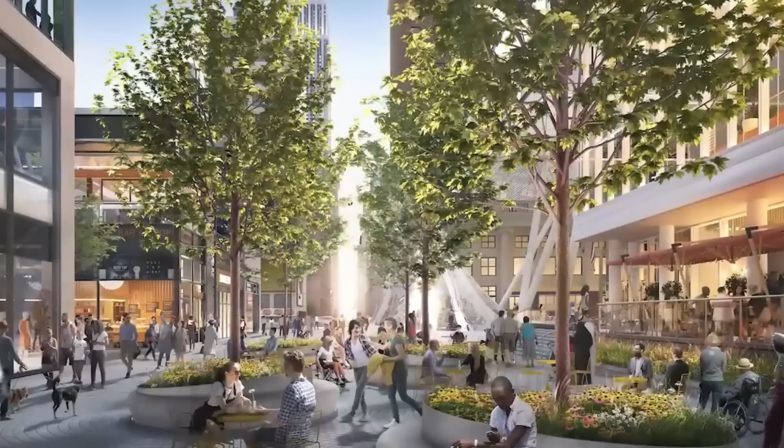This redevelopment aims to transform and revitalize the area between 6th and 7th Avenues and West 32nd and West 34th Streets with a total of 8 new buildings.

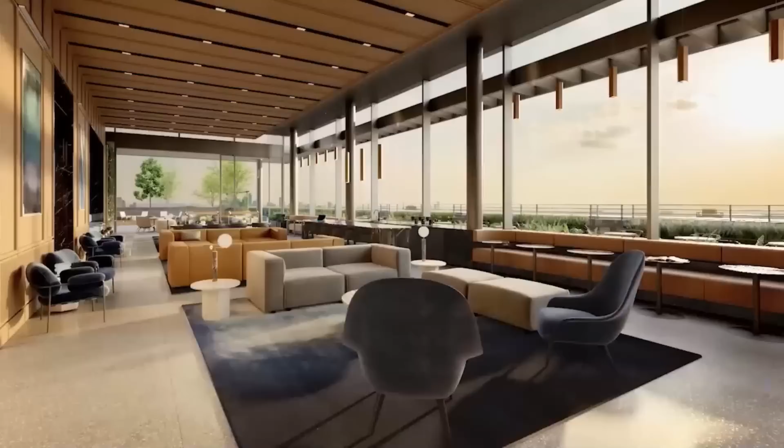In a nutshell, the overall appearance of the tower makes it look like a chest of drawers. But if you start to look closer, that's truly where you can admire its grandeur. The latest renderings show 9 cantilevering volumes topped with landscape terraces on the western elevation. The northern face is lined with steel beams and metal paneling, with 3 vertical window columns. The rendering also showcases the tower's relative height to that of the Empire State Building.

15 Penn's top tenants have the advantage of a 360-degree view of lower Manhattan's skyline and New York Harbor. The lobby's futuristic design fits a skyscraper of the 21st century. The lobby's high ceilings are enclosed by an equally tall glass frame overlooking the street. It looks even more majestic at night as the light from the inside shines on the outside pavement. The main lobby is as spacious as a shopping mall with 4 escalators to facilitate people's movement.

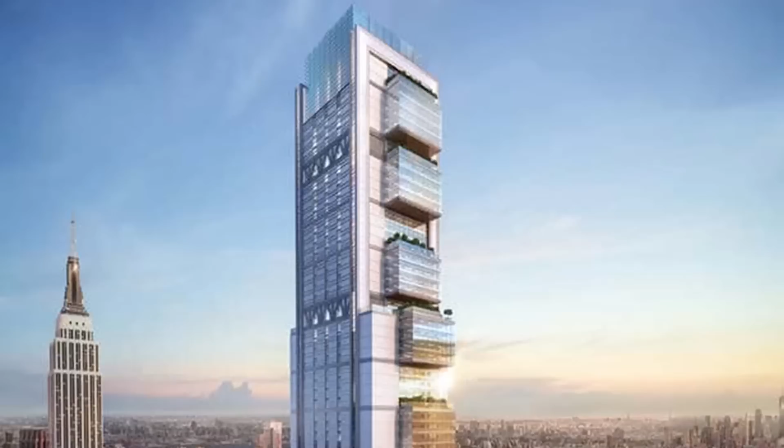The updated design shows a different version of the tower's crown. The old design consists of an extension covered with horizontal metal grills. The new version replaces metal with glass, so you'll see rectangular glass boxes stacked on top of each other. The extensive use of glass gives a very sophisticated energy to Penn 15 and makes it appear lighter and hence less bulky. Penn 15 will be divided into 5 tiers that encompass several office floors that would be serviced by its own set of express elevators.

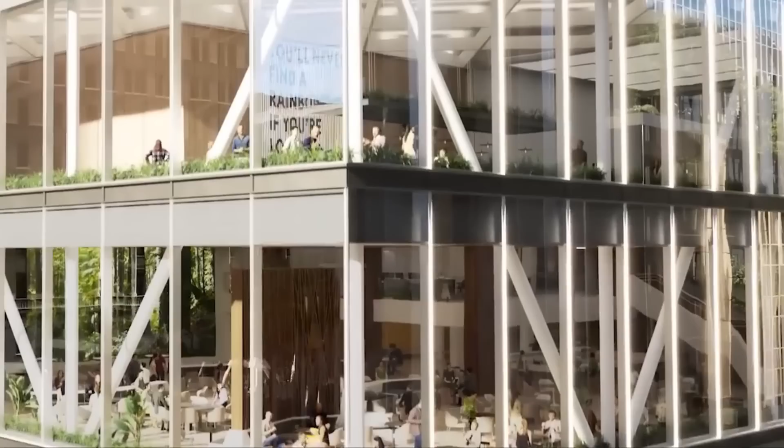The highest office level will be 1,165 feet high on the 61st level. A total of 27 landscape terraces will be found on varying heights on the building's spine. It almost looks like a vertical farm from afar. In that way, it stands out from the rest of the monolithic structures dominating the region.

While the project seems great, there is only one bad outcome. To build this 1,270-foot tower, Hotel Pennsylvania had to be razed to the ground. The demolition of this century-old hotel is almost complete. During its heyday, Hotel Pennsylvania was once one of the largest hotels in the world, with 2,200 furnished rooms. The hotel hosted top-notch celebrities and politicians of its time, like Fidel Castro and Duke Ellington.

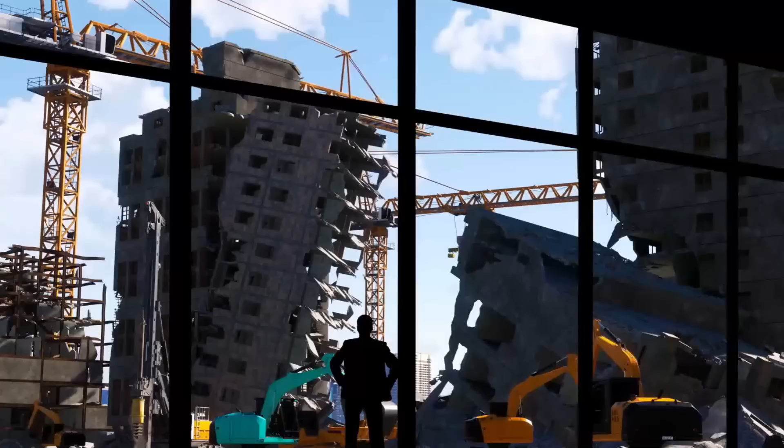Vornado Realty Trust bought the hotel back in 1990, and in 2008 it was given the status of a landmark. After fierce and unsuccessful preservation battles, the 22-story hotel was finally demolished in July 2023. Construction of the tower is postponed as of now, and Vornado is considering using the site for fashion shows or other temporary use. The tower's construction has also been postponed in the past due to low office market rents.

Undoubtedly, this has made some people angry who were against the demolition of the historic hotel. To be fair, it appears to them it was destroyed to build a commercial tower whose plan still hangs in the air. If construction goes ahead, Penn 15 would cost a whopping $1.3 billion, or even possibly more depending on how much it gets delayed.

Number 5, Affirmation Tower. This tower comprises of 5 rectangular boxes that grow in size as they climb upward to its 1,663-foot mark. Given its upside-down step design, it gives the illusion that it might tip over on a windy day. Designed by award-winning architect Sir David Adjaye, his designs tend to incorporate bizarre shapes into a neat and sleek design.

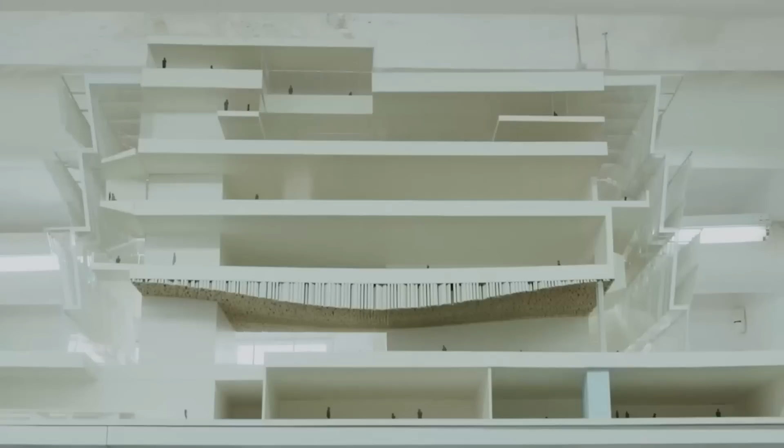Built and funded by Black and female-owned businesses, the project's partners agreed that they'd give more than 30% of construction work to minority and female contractors, totaling more than $1 billion. The Affirmation Tower is expected to hire more than 30,000 New Yorkers over 6 years, including 15,000 permanent jobs, bringing in more than $5 billion in new tax revenue for the city and state over 30 years.

The tower will feature almost every amenity that a modern high-rise would have: an entertainment complex, a rooftop eatery, 2 hotels, a ballroom, an observation deck, and even a skating rink. It'll house quite a few commercial businesses, making Affirmation a destination for hospitality, retail, and commercial businesses. Affirmation Tower was shaping up to be the tallest building in the Western Hemisphere, but the architect and developer held back for one specific reason.

Out of respect for the people who lost their lives in the 9/11 attacks, Affirmation Tower was made slightly shorter by spire height than One World Trade Center.

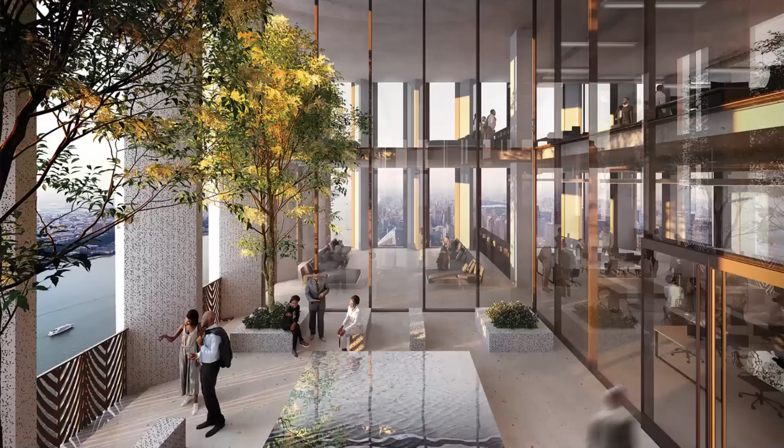Let's examine the exterior more closely. The tower goes 90 stories up with white vertical fins spanning each of the 5 boxes. Behind these fins, there's a floor-to-ceiling glass wall separating the building from the outside environment. Upon closer inspection, you'll see that the top 3 units are equipped with landscape terraces. The rooftop's also enhanced by adding lush vegetation and closed by the extension of the white fins.

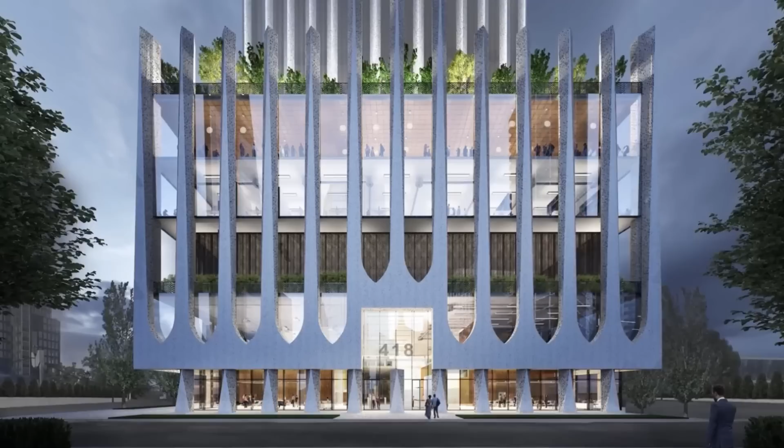The ice skating rink would be available in the winter months. Here, residents and non-residents can skate their way along with bonus views of the Hudson Yards. The main entrance also shows the same parallel line pattern consistent with the rest of the tower's body. It'll be positioned along 11th Avenue, while a separate entrance for the observatory will be located on the other side of the ground floor.

The Affirmation Tower would be a $3.5 billion addition to Hudson Yards skyline.

Number 6, 520 Fifth Avenue. We had purposefully left the most glamorous skyscraper for the last. 520 Fifth Avenue is also a mixed-use building under construction in Midtown Manhattan. It may not be the tallest out of all the structures that we discussed, yet it still has a decent height of 1,000 feet. The 76-story structure will span 415,000 square feet and yield 98 condominium units and commercial space spread across the ground floor and 4 cellar levels.

Its design's unique from the grid window pattern seen in most tall buildings. The tower will feature arched windows repeating along the entire length of the tower. The front view sketches show landscape terraces at varying heights along the facade. The ground floor entrance plays with the same details of arch columns, and the building's address is shown embedded into the sidewalk in interlocking numerals at the foot of the main doors. The arch details of the exterior wall were inspired by the New York Public Library and Grand Central Terminal.

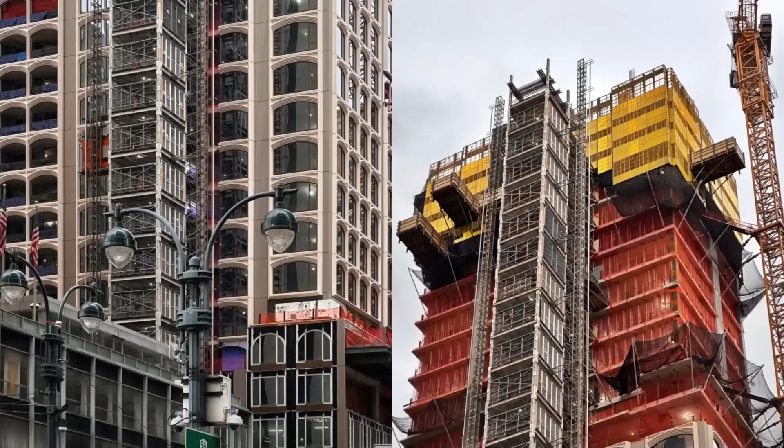The development firm behind this project, Rabina, closed on a $540 million construction package to complete 520 Fifth Avenue. Recent photographs show the skyscraper nearing the 1/3 mark, followed closely behind by the installation of its facade. 520 Fifth Avenue's completion date is posted on the construction board for June 1st, 2026.